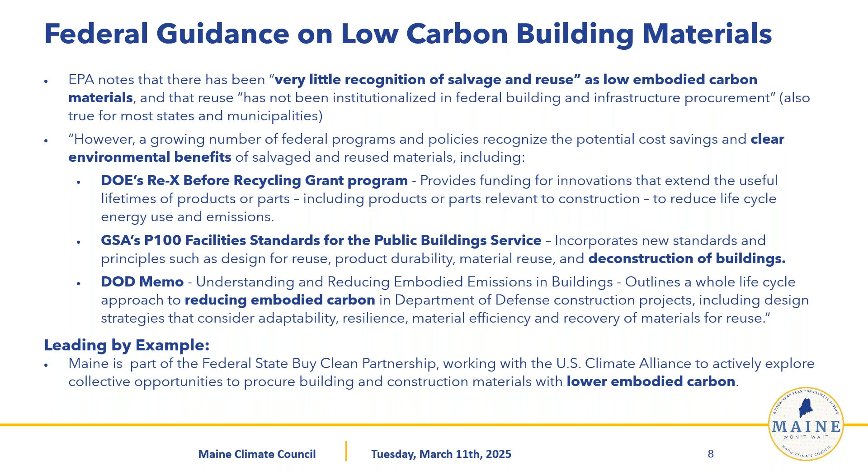Construction and demolition, if you don't already know, are a huge source of our global emissions and also a huge source of our global waste. If we were really focused on deconstruction, we also have the potential to reclaim huge amounts of lumber for building new homes, which, as anybody in the housing sector knows, we have a real shortage of housing, especially affordable housing right now. So deconstruction presents a huge economic opportunity as well as a source for materials for affordable housing.

In Maine, we have territorial emissions goals to reduce our emissions. When you look at that from the in-state perspective, waste is just a really small part of our emissions, about 2%. But if you take a step back and look at emissions from a global perspective, thinking about emissions across the supply chain of stuff, then we see that materials management — from the point of extracting resources to make products we use, to the point where we dispose of them — is a huge portion of our emissions, and buildings are a big part of that.

Resource extraction has tripled over the past 50 years, and there's scientific consensus that this has been a big contributor to climate change, biodiversity loss, and pollution. This means materials management represents a huge opportunity to reduce those impacts by using things more efficiently. Any kind of practice that preserves materials is going to reduce those consumption-based emissions.

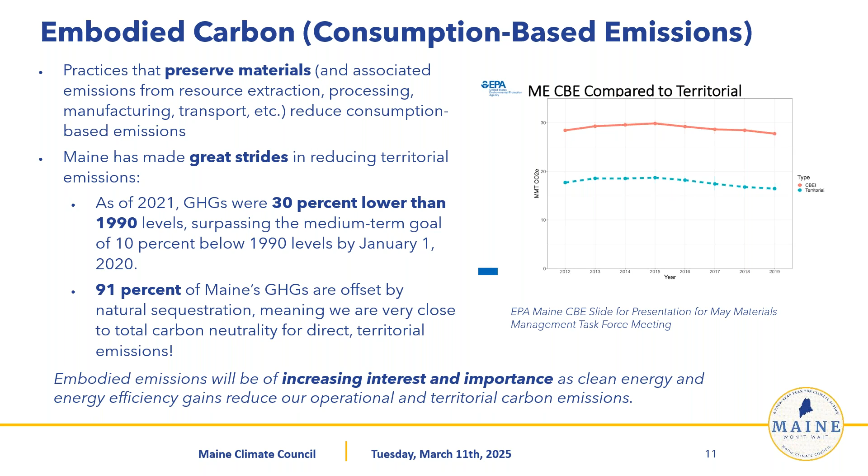So then we start thinking about our supply chain, or our scope 3 emissions. Building materials present a huge opportunity to reuse. Most of the debris that comes from construction and demolition is demolition — only about 10% comes from scrap. Even here in Maine, a small state with less than 1.5 million people, we produced over 600,000 tons of demo debris in the last year we have data for, which was 2022, and only about 2% of that made it out of a landfill.

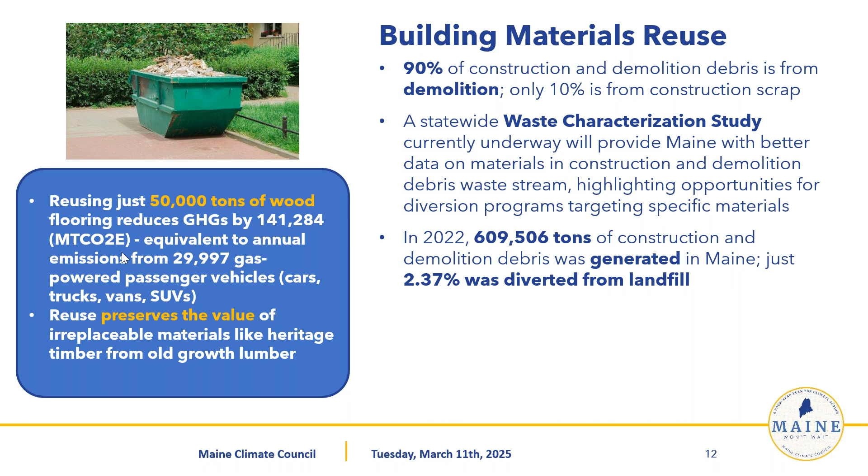Just a little snapshot here in the blue box — this is modeling done with the EPA's Waste Reduction Model. You can see that reusing just 50,000 tons of wood, a very small piece of that overall tonnage, has an emissions reduction equivalent to taking almost 30,000 gas-powered passenger vehicles off the road for an entire year. Plus, you get really quality materials when you salvage, like heritage timber from old growth lumber that you just can't find anywhere else. So there's a lot of benefits there.

Just some terms to know about deconstruction. Demolition, as you almost certainly already know, is just tearing stuff down. Deconstruction is when you carefully disassemble and try to extract maximum value from anything that can be salvaged for reuse or refurbishing. Depending on the case and the building, there's a soft strip, where you might go in and just take the really high-value stuff, or there's a whole home deconstruction.

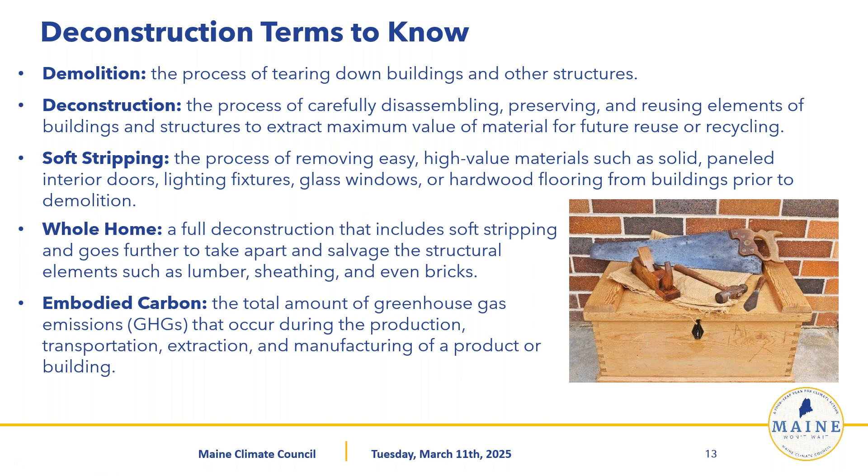And I know we're here talking about brownfields, so think whole building instead in this case where feasible, which is really when you take everything apart and you're getting down to the structural elements and trying to recover as much as possible. And then embodied carbon, I already talked about—that's the greenhouse gas emissions that occur from production, transportation, and extraction. In most cases, territories like states or local governments aren't counting those emissions because they're not part of their territorial or sector-based emissions.

There's also a huge amount of workforce development opportunity. There was a study on the circular economy just looking generally at reuse and refurbishing, and the job creation potential is massive at 300 jobs per every 10,000 tons of waste, compared to only 1 to 6 jobs for disposal pathways like landfilling and incineration. They also found that a lot of the circular jobs had better working conditions, higher pay, and there's the opportunity to bring back some historic skills, like this campaign for historic trades, linking deconstruction and some of those traditional skill-building trades along with construction, learning how to reuse and refurbish and build things from scratch. So when you pair construction with deconstruction skills, you really get a workforce that's capable of a lot more, and it opens up new economic pathways for different jobs.

There's also community resilience here. Communities where they have refurbishing warehouses kind of give a sense of place, and you can bring people in from the community to learn skills. That would be obviously different from a business environment, but in some cases there's entities like the Finger Lakes Reuse Warehouse, which is more of a community organization, but they're still teaching skills and turning out workers who have grown as a result of being involved.

There's also been some examples of public-private partnerships. In Phoenix, they started a reuse hub, and it resulted in 19 companies that were launched, 14 patents, and 15 products over the course of 6 years.

And then just a little bit more on that particular study, just to get the high-level idea of what's in there, noting that in many cases, whether or not deconstruction is going to be applied at a site is a ranking criterion. So if you're applying for a grant, for example, it would make you more competitive to work in aspects of deconstruction or material reuse. They're going to want to see that in the grant application. It saves money, resources, job training, and it also has the potential to earn LEED credits for a site. Not to mention, as they say, it's just also the right thing to do. And there's also guidance in that guide on dealing with things like lead paint, asbestos, and other contaminants that we find in a lot of these older buildings, particularly brownfield sites.

So just again, the triple bottom line of deconstruction—there's social benefits.

In many cases, where some of these brownfields are being demolished, there are communities that are impacted. The demolition tends to take place in lower income communities, and communities of color have been disproportionately impacted. Contaminants from site demolition can end up contaminating the air and the water. So again, another reason why deconstruction is really a safer way to go.

A huge amount of economic benefit. A study out of New York found that shifting to building deconstruction from demolition would really reshape an entire sector of their economy in a positive way.

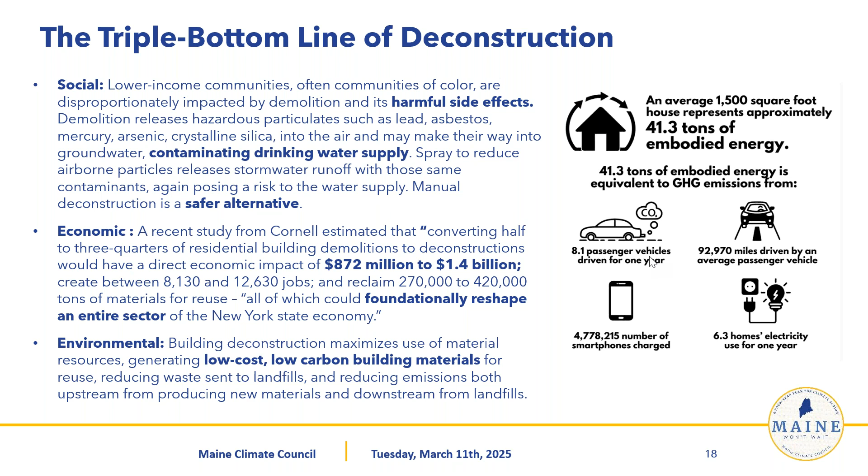And then obviously we talked about the lower embodied carbon for these materials, which really is a huge benefit. Even just a regular little single family house has about 40 tons of embodied carbon, so something to think about. Just on any level, a bigger building obviously has even more of that.

Thinking about municipal procurement for salvage materials, or partnering with organizations like those involved with historic preservation, are typically good partners. And it's also really important to have marketplace development for the reused materials, to ensure you've got an end market for the materials once they're salvaged.

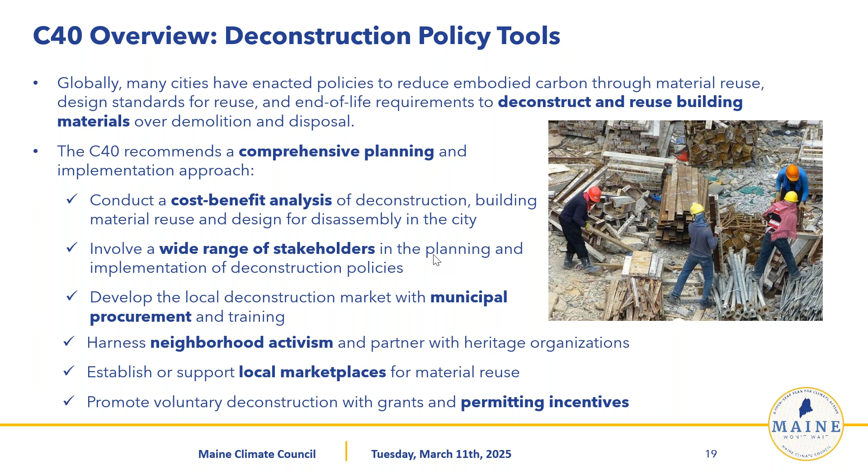So just a snapshot, deconstruction is in our climate plan in Maine now, and there are a lot of other, mostly municipalities, but there is one other state that has a climate plan, and you're seeing a lot more awareness of deconstruction potential in municipalities that have passed deconstruction ordinances. And these aren't all mandates. Some of them look different, some might be tax credits, so every one is unique to the community where they're passed.

And then the biggest barrier, of course, is just low cost disposal. But with deconstruction, there are other costs that are not factored in. When you're looking at demolition, it's just one lump cost, but with deconstruction, there's also economic benefit from the materials that are salvaged. So it's important to think about it in that long-term perspective over the course of a job, rather than just the upfront fee.

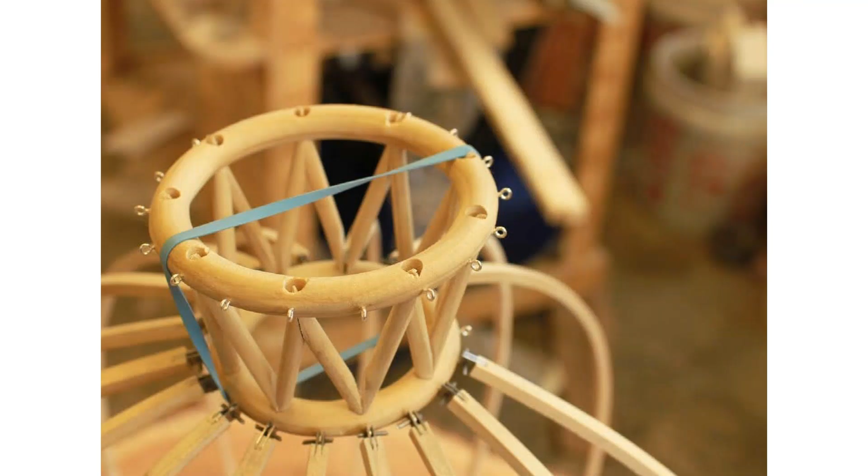What I experienced was, in shifting all of the studios out of that former space into the new studio, it allowed the shop to expand considerably in that old building, and that had a much more transformational impact on the architecture program, art program, and planning program which the shop served. There was enormous opportunity for students to learn more about hands-on building processes, which I think is really important for architects to learn.

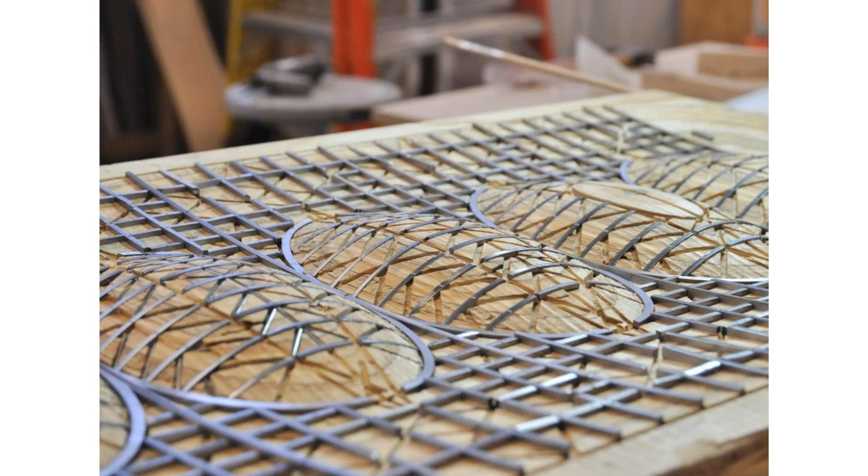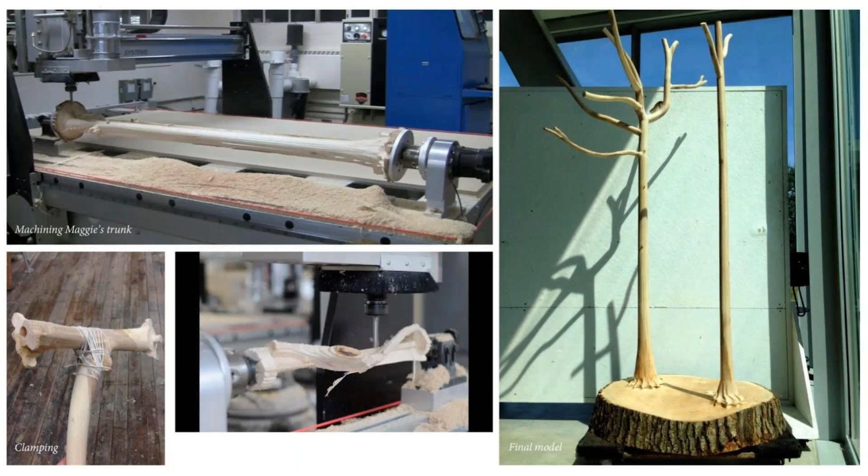So I helped students, assisted them with all these different complex projects, building models and things like this. We built practical things as well, canoe paddles and other models.

One of my takeaways from that job - I worked there for 5 years - was that we had a dumpster outside, and right after the projects were over, students would often be throwing out their models that they spent hours slaving away on, all-nighters and all of that. I just thought, couldn't there be a better way? Could we be thinking proactively about what these things could become afterwards?

So again, there was this revival of hands-on practices with the shop, but there was not as much thoughtfulness about where materials would go. So in my last year working at Cornell, I helped co-found a student organization called Building Community, where students from any department could join and work on community-based design build projects.

We started to partner with some of the local reuse facilities. There were 2 significant elements at Ithaca Reuse. We worked with a 4-H program here, building benches and teaching them how to use basic hand tools. We also worked with Hammerstone Builders - this was a women-led building project.

Reviving old sort of shops like typography, putting together dinners and supper clubs, and we built all of the tables for those and got people involved.

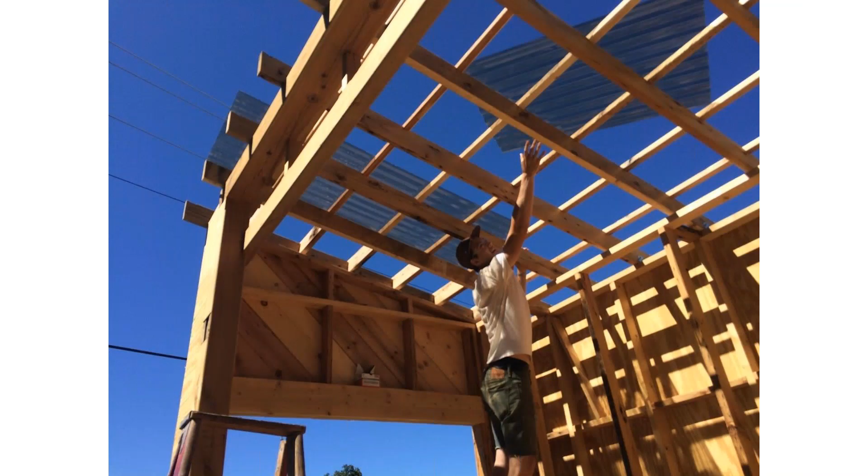The biggest project we did there was building what we call the traveling tool library, to make tools available to the public. For this project we used entirely salvaged materials from some of those stores I mentioned before, as a way to learn how to work with older lumber that might have defects but is certainly workable back into newer projects. This project was not only a tool library, but it also became a stage set for performances, and it's still out in Ithaca being used for a variety of things.

My first intersection with deconstruction and a reuse business was in Buffalo, New York. I started working with a fellow out there and his business Reuse Action - this fellow here, Michael Gainer. He landed in Buffalo, having used to live in the Boston area.

He was there when the mayor instituted a fast track demolition program, which a lot of mayors in Rust Belt cities did around that time, in the early 2000s. He was calculating in his head how much taxpayer money essentially was being used to clear away what were deemed abandoned buildings and hazards to the city, when people across the street needed to repair their own buildings and homes, couldn't afford materials from stores, and were also looking for employment. He connected the dots and realized there's something here we can do better.

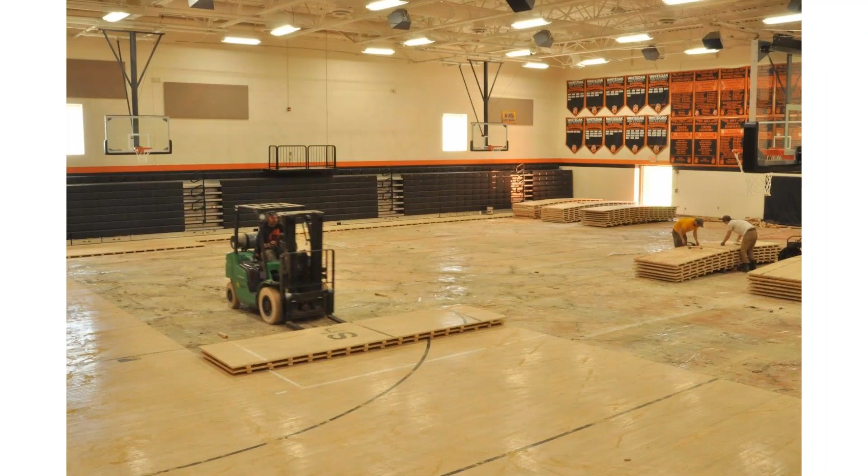So he founded Reuse Action. I did a little bit of work with him. He started with trying to intercept a lot of these homes slated for demolition by the mayor, but I also worked with him on this example here - saving an entire gym floor.

We actually did 6 of these at different public schools. One thing I think people don't really think about in terms of deconstruction is that demolition is fairly straightforward - it's just how quickly can you get this material, crush it, and get it in a dumpster and remove it. Deconstruction has a lot more innovative potential.

The way a gym floor would normally be demolished is you'd go in there with maybe a crew of 4 or 5 people, cut sections of the floor as small or as big as you can where you could still pick it up, then walk it out to a dumpster and throw it in. I actually witnessed this when I was working at Camden Hills Regional High School here in Maine - later on we had to have our gym floor replaced because of water damage, and it took about a crew of 4 or 5 people over a week to do that.

Whereas Michael, myself, and one other person shown here in the image were able to save this entire floor in just a day and a half. With a forklift, we just snapped lines, cut the pieces into sections, 4 by 16 foot, palletized it, and then the trickiest part was just kind of getting it out the door.

But this shows that deconstruction can actually, in certain cases, even be more efficient because you're really thinking thoughtfully about what you have to do and how you can make all of this stuff sort of available to the marketplace again.

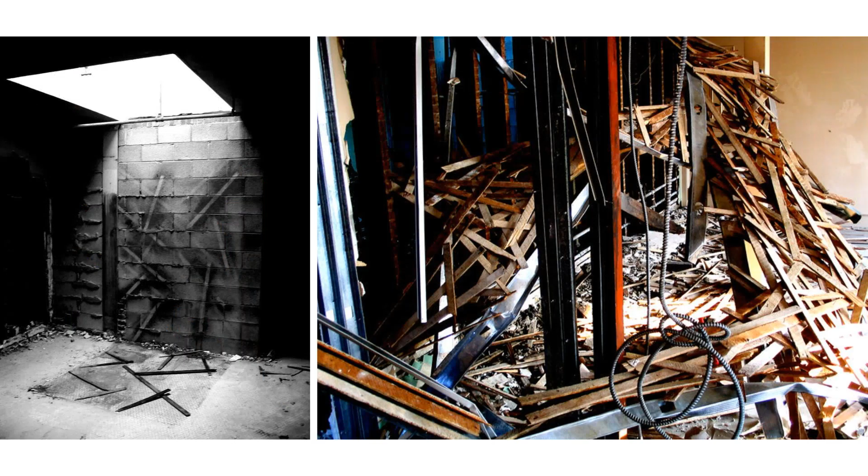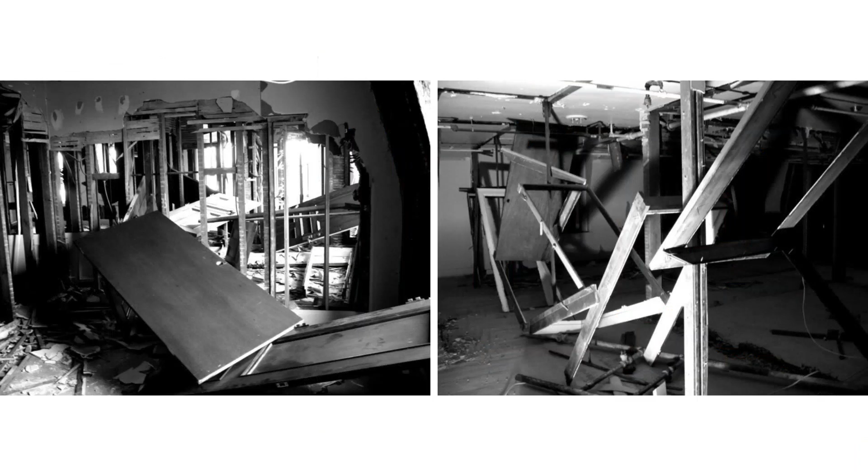His work actually started with when he moved to Buffalo. He was doing demolition at night, and teaching at the school during the days. One of the things he started to do was make art installations in some of these demo projects, kind of moving materials around, making these installations, photographing them, and then putting everything back before the rest of the crew arrived in the morning.

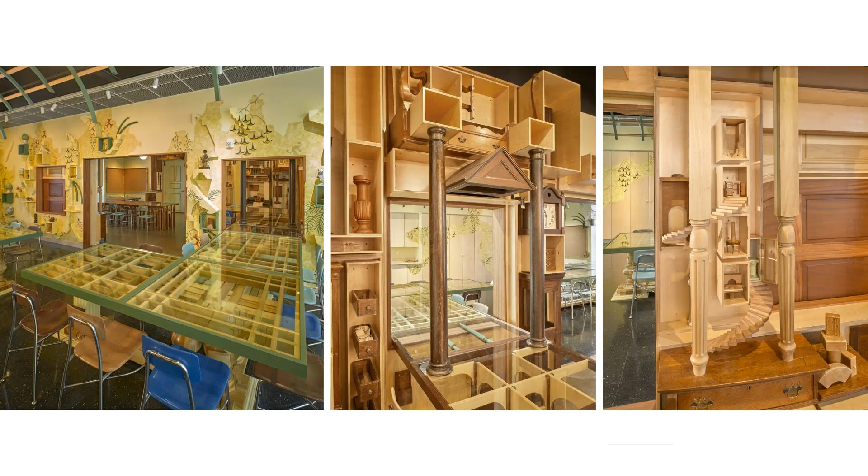This sort of obsession with material waste kind of led to his art practice. So he does everything from large scale sculptures to wall pieces like you see here. Today he's now doing all kinds of architectural interiors and things that, again, are just using things from the waste stream in Buffalo. He loves to go to estate sales religiously and pick away things that people see very little value in and make them come alive again.

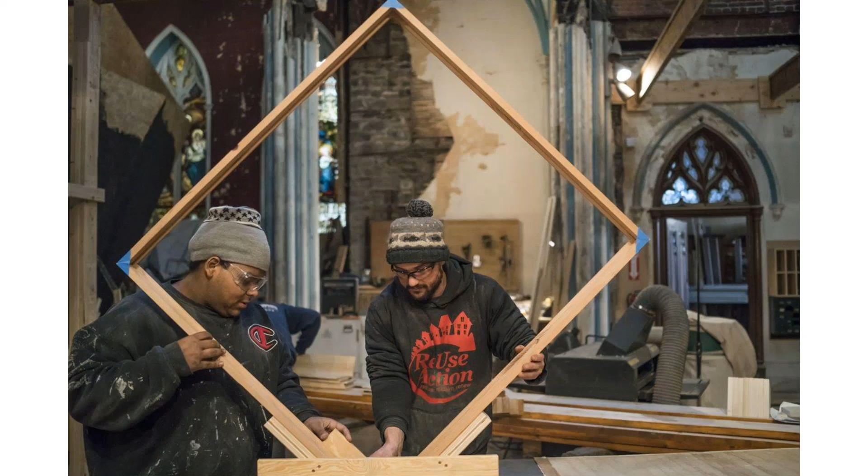So we turned a lot of the materials that we found in this church, like the pews, into work benches and work tables and sawhorses, and cleaned up the sanctuary into the wood shop, bringing in all sorts of experts in furniture making. There's me working with one of my students on a huge frame that he wanted to make. This program is still running, and it's developed a lot since then, but it's just another example of how deconstruction can go so much further past just waste diversion - it's also an amazing opportunity for education and workforce development.

I then moved to Chicago, where I worked for a bit at a nonprofit called Sweetwater Foundation. Sweetwater is located on the south side of Chicago in a neighborhood that's been also the target of fast-track demolition under Mayor Emanuel, Rahm Emanuel. Emmanuel Pratt, shown here with me, is the executive director, a really brilliant human being, super creative, with a background in architecture and urban design and urban planning.

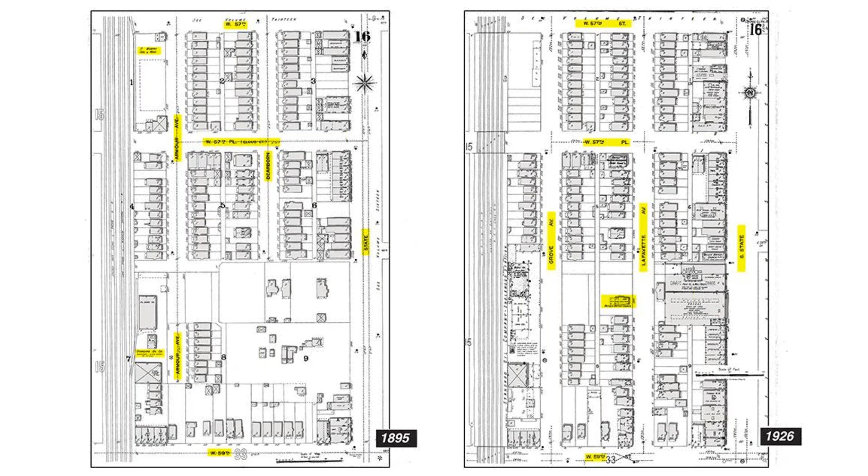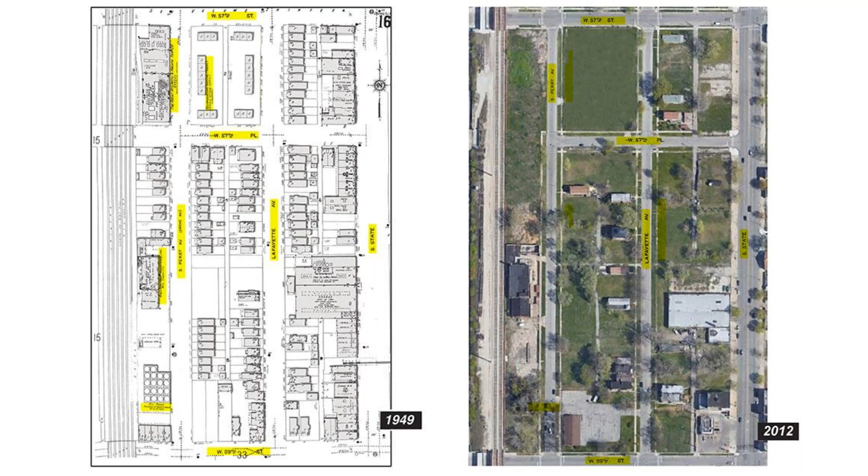Here's some Sanborn maps that just kind of show you the area, which used to be highly populated, but as you can see, in 2012, when Sweetwater was started, so many of those buildings, those homes that you see in the image on the left, had been demolished as part of this fast track demolition initiative instituted by the mayor. So what do you do with all of this vacancy?

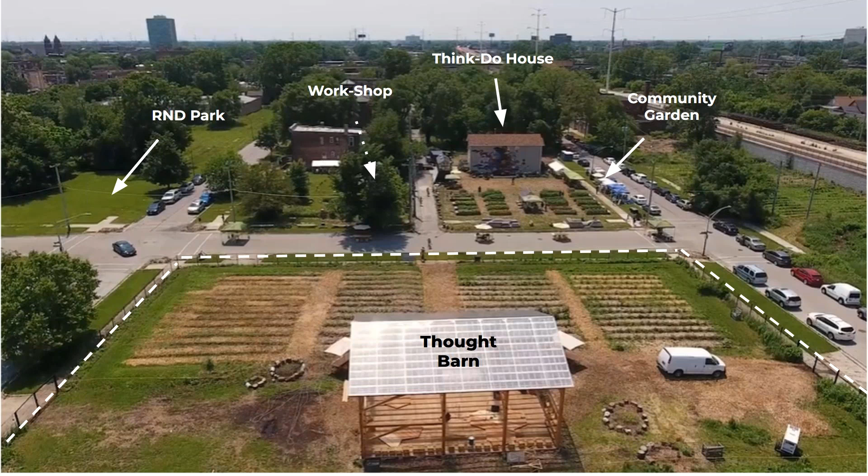So Sweetwater has started to rebuild the neighborhood with folks who have stuck it out and who still live there, and also bringing in folks like myself from outside to help be part of that network. They did the first - you can see on the bottom there, the Thought Barn is in the middle of an entire city block. It's the first timber frame barn structure raised in the city of Chicago since the Great Fire. This is a community space, and surrounding it is a community farm, because this area is technically also a food desert. So growing food is a huge part of what Sweetwater does.

And a central principle at Sweetwater Foundation is transforming waste to resources. So all of the building projects that we did, we almost exclusively sourced materials from the region's waste stream, often higher grade pallets that we're shipping, say like large expensive glass to do new construction downtown.

We would intercept those pallets, take them apart, and turn them into, say, raised beds. This is the community garden, open to the public at all times.

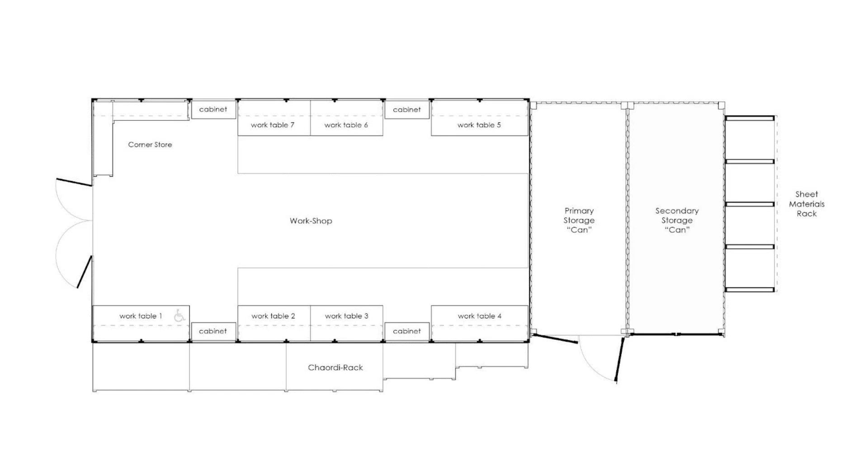Also on the farm, intersecting with a lot of local schools, public schools, so they can do outdoor education. And then there was also, something I sort of specialized in, a carpentry apprenticeship program for youth, which we built out of a greenhouse space so we could keep it heated, just using sunlight even during the winter.

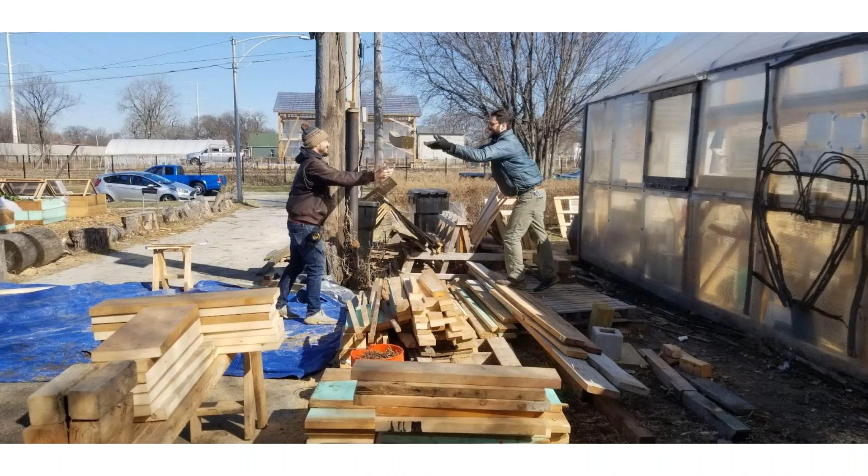Just using what we had, being really resourceful, cleaning up, and turning it into a curriculum - how to take old 2x4s and turn them into all sorts of furniture projects and other things. These are called fractals, and we would sell these too, and a lot of people in the area liked to buy them and support what we did.

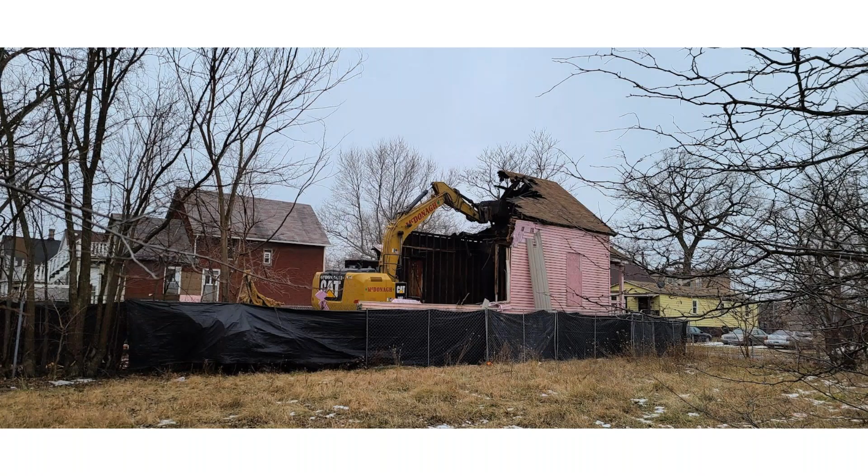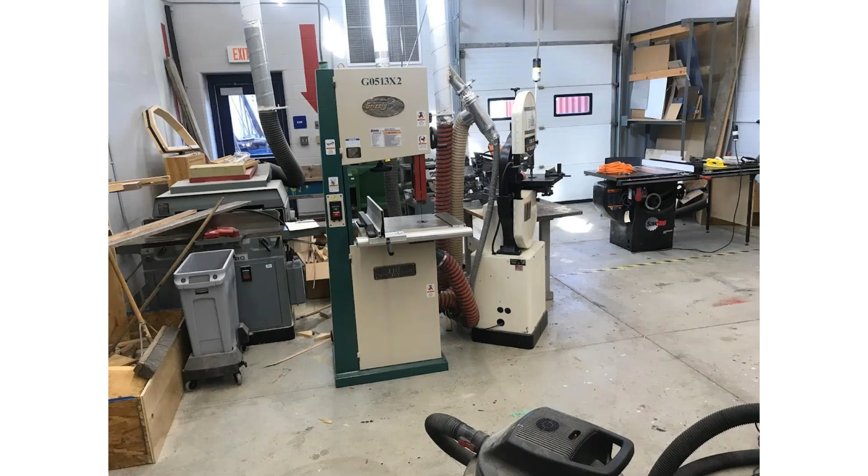There was materials everywhere outside, and the tools were all kind of all over the place. But having just come from Sweetwater and seeing what transforming waste to resources looks like, I saw the amazing potential in all of this. There were a bunch of pallets, so I thought we would start with that. And I rebranded Sweetwater's tagline, Transforming Waste to Resources, into Radical Reuse.

So for this program, I instituted this principle - the idea that we would only source materials from our region's waste stream, to do educational projects with students that had some sort of community benefit. So we collected a bunch of pallets from local hardware stores and other pallets that were around the school. This program started when COVID was still something we had to be sensitive about.

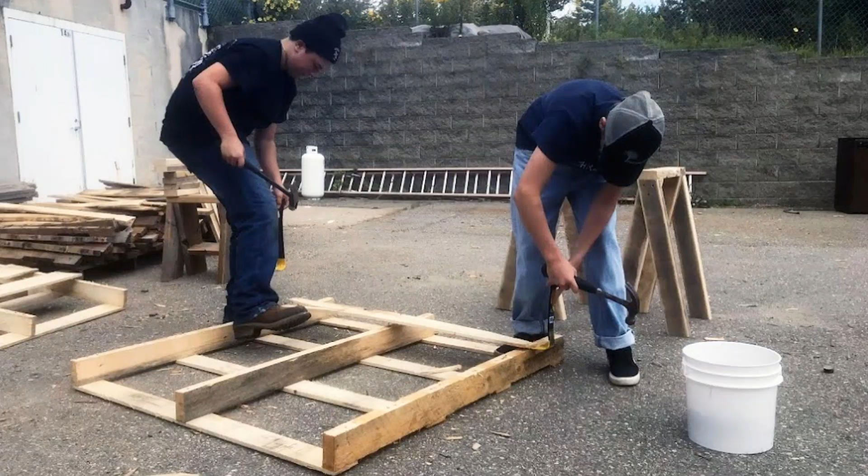There was a mask mandate when we were indoors, but students could take their masks off outside. So I hosted outside what we called Pallet Palooza, which was like a pallet deconstructing party, just to introduce myself and the students to the idea of salvaging materials.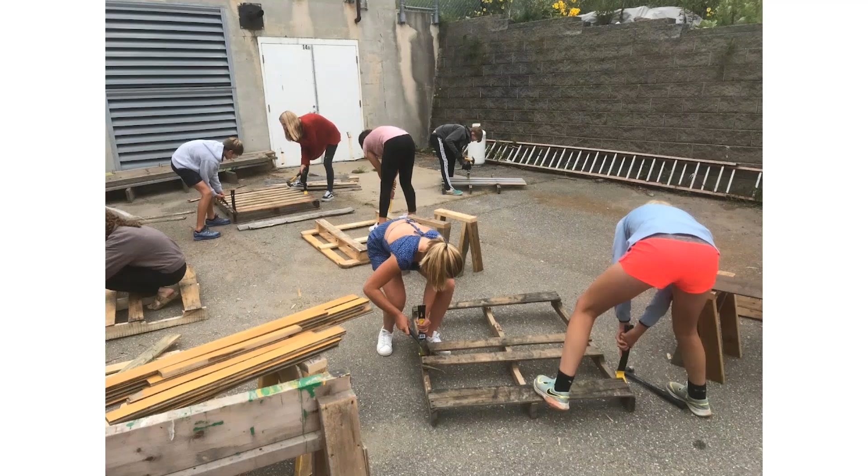I didn't know how this would go, but students were really into it. There's actually a lot of technique involved in taking pallets apart successfully without breaking the wood. So they got to learn how to swing a hammer and use a pry bar properly.

Skipping ahead to three years later, once the program had done all these projects in the community, it had gained a reputation for this idea of radical reuse. There were folks asking, could you deconstruct this house or this building in town? And so I thought this house we're seeing here was a good opportunity to try that.

So we did this last winter. This was a house right in Camden, built in 1890. And it was a good candidate for deconstruction because it had been vacant for 40 years, and there was no insulation in the walls, surprisingly.

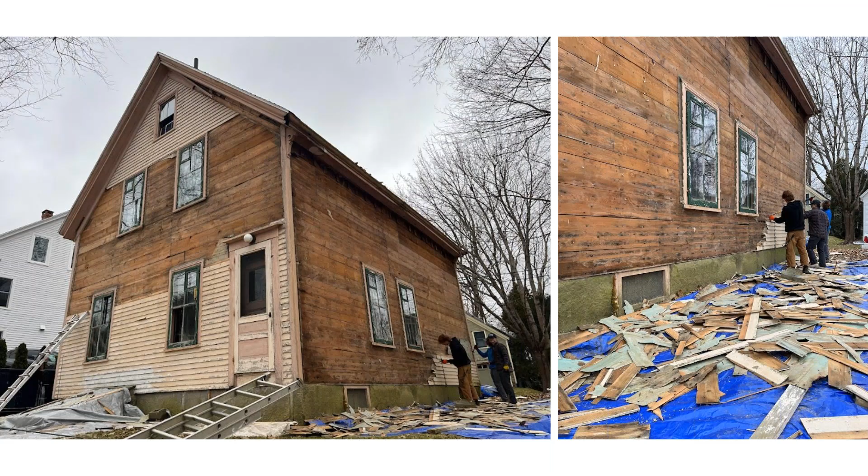There was no asbestos present, so a lot of the hazards that normally come up for projects like this, we didn't have to deal with. There was lead paint, so when we started with the siding, we just tried to contain the lead paint as much as possible - no cutting, just prying it off. In places where deconstruction is a bit more advanced, like in Portland, Oregon, for example, which Megan mentioned, even these materials often get saved and repurposed.

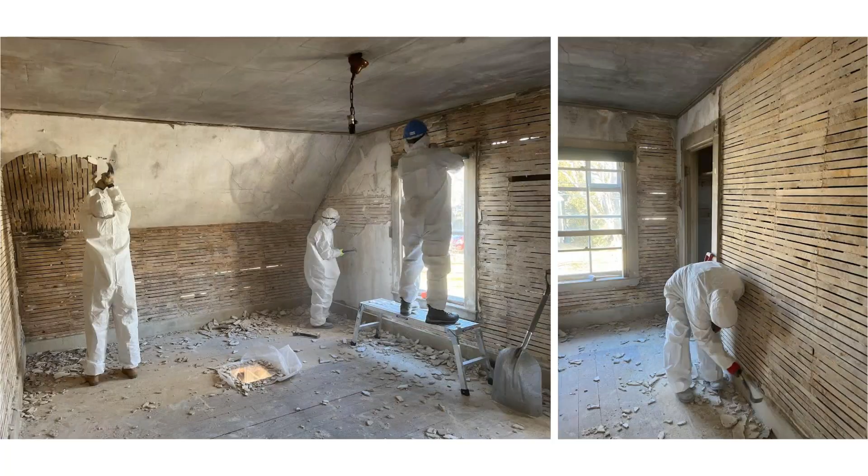But just to minimize hazards, this was one thing that we decided to just remove and dumpster. We took the plaster down next. A bunch of students and some of my friends were involved in that.

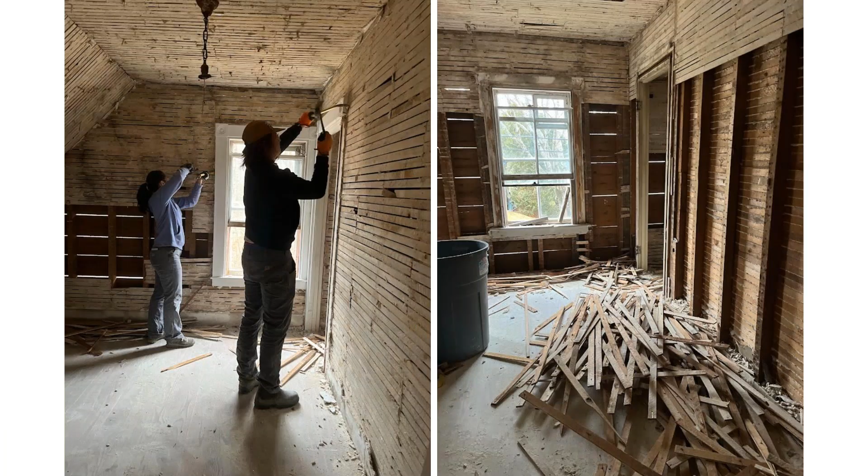Again, there's innovative ways of doing this sort of quickly and smartly. Plaster is incredibly heavy and messy, but rather than bag all of that ourselves and carry it out the door, there was a site worker who was going to come in and redo the foundation. There was a new structure going up there. So we communicated with him that we would put these bulk bags in the basement and sweep everything into those, which made it much easier to deal with. Then he could pick those up and deal with them when he had a machine present.

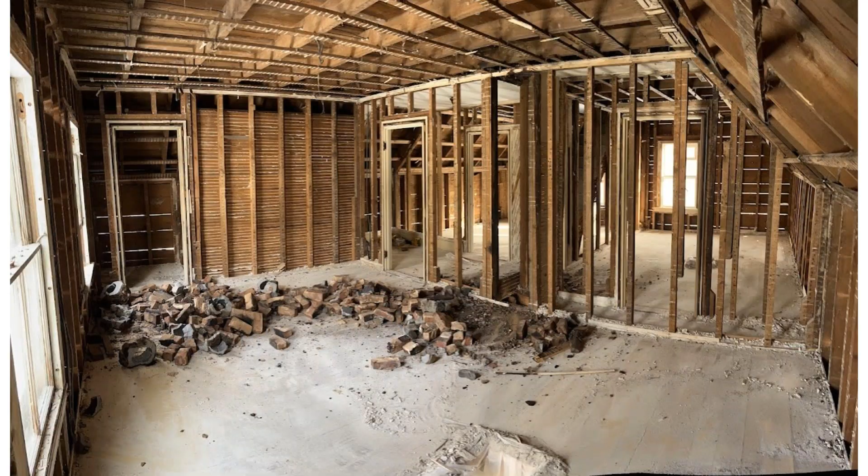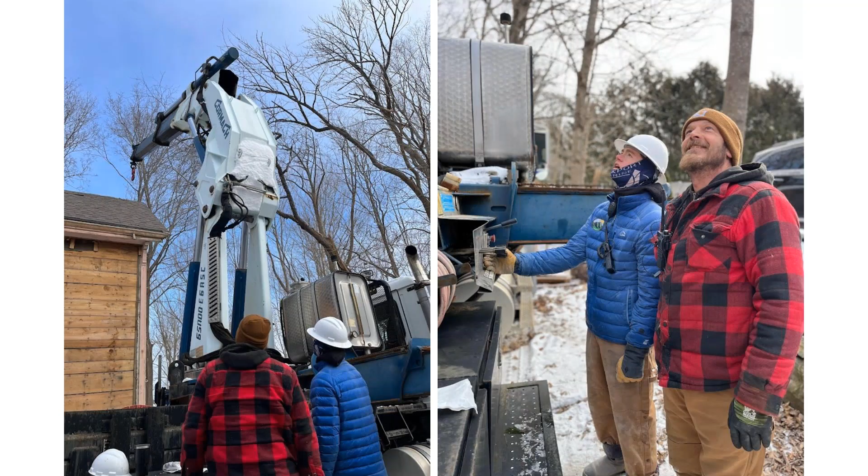We saved a lot of the lath too, which I'll show you later what that can turn into. And then using techniques that I learned from my friend Michael in Buffalo to get off the site quickly and not hold up the contractors, we cut the house into sections and used the boom lift to bring everything to the ground so we could deconstruct it off-site at a later date and not have to slow anything down.

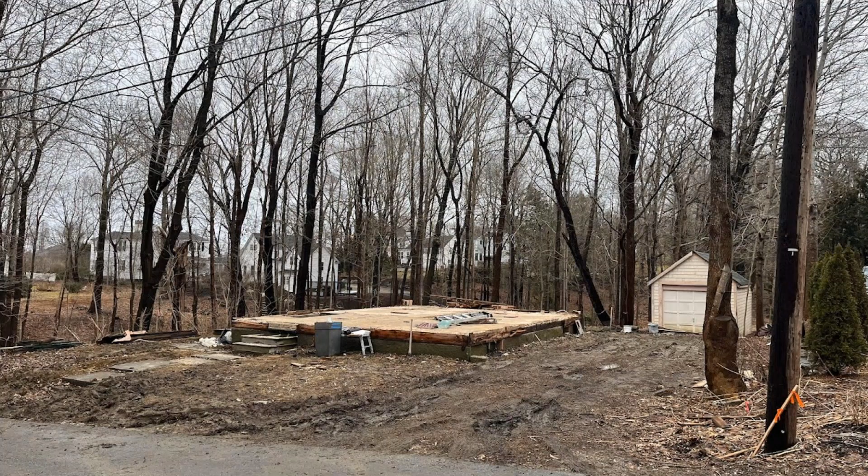That was the house. Just got a couple more minutes. So just, okay, yeah, yep, one or two minutes. Almost there. Okay, thank you.

Everything that I couldn't personally use, or the students couldn't use, like the windows and doors, got donated to Habitat Restore. So there's opportunities to create partnerships with folks who are already doing this work.

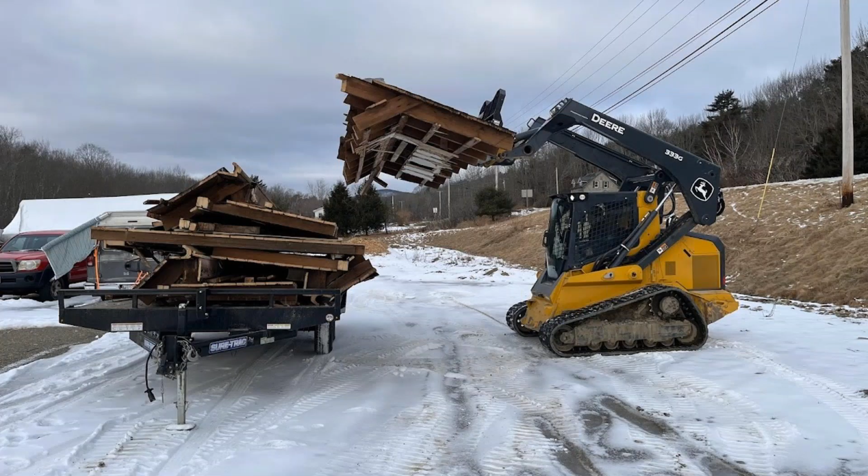And slowly over time, as we needed materials, we would bring these sections over to the school, denail them, and we had a whole stockpile of materials to do all sorts of different projects.

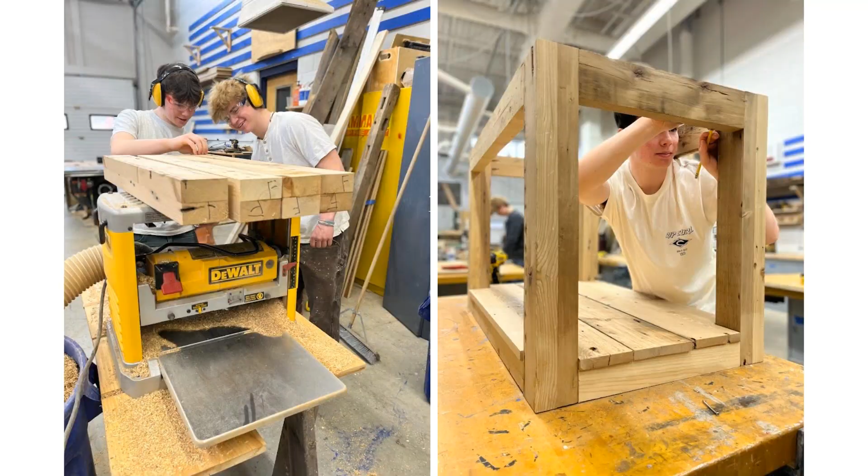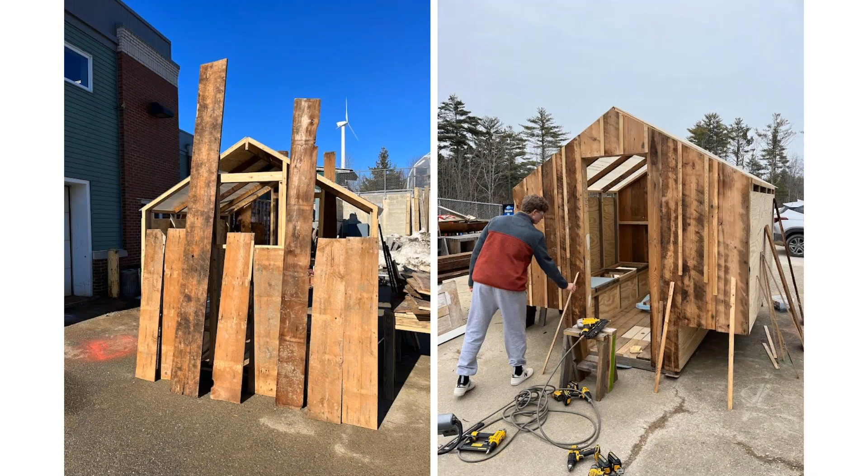I worked with a lot of hockey students and they needed a stick rack for their locker rooms, so this is the stick rack using lath and some of those sheathing boards from the house. This is for the ceramics class, a table that helps recycle used clay with a plaster slab to extract moisture from the clay. Ice fishing shack, tables, guitars, all sorts of things.

Even working with the middle school and doing some projects, some benches outdoors. And a bunch of musical instruments as well, and even some performances.

Another benefit of doing deconstruction is we lose a lot of our history when we take older homes down. And Knox County, I think, has some of the oldest housing stock of any county in Maine. So as we were taking the house down, on the back of the siding, we saw all these old companies that used to exist.

And even in the walls, I found some film and got it digitally scanned, and it was all these images from, I believe, the Korean War. I'm still sort of unpacking the history of this house, but all this stuff would have been lost had we not deconstructed it.

So yeah, again today I've started a business, bringing this whole idea of radical reuse forward to the next level. I started a company called Second Story Builders.

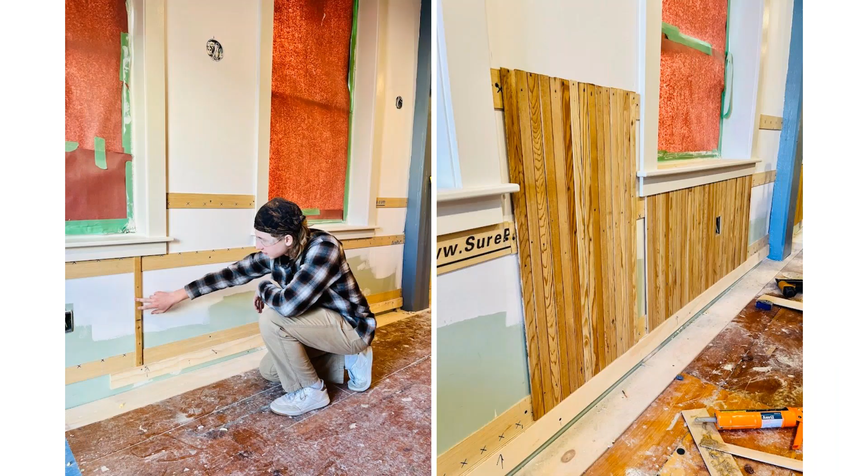I've been continuing to work with students and youth on a project right here in Camden. There's a cafe that's going to be open in April, and we're using a lot of the materials from this house. Here's some of the lath to do some of the work on the interior. This is just one example of what you can do with lath - clean it up, skim plane it, and we're using it to make wainscoting in the new cafe.

And I have a few deconstruction projects lined up for the next few months. So anyway, if you're interested in learning more, please feel free to reach out, or if you have deconstruction work, I'd love to help give you some advice on that. So I'll end it there.

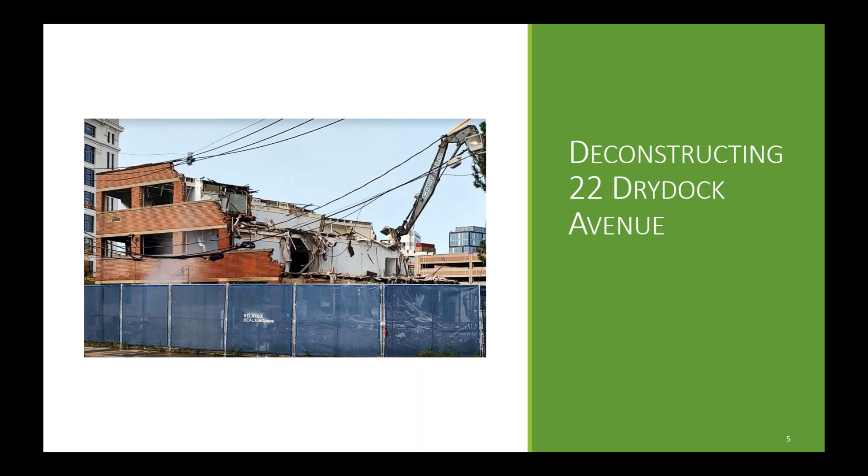So Jennifer, the first project we'll look at is an area of Boston, the Seaport, where we were engaged to take down two buildings, 22 and 24 Dry Dock Ave, for a local developer. And we set about this very intentionally from the beginning. Jennifer, if you could flip forward.

We evaluate every building and every work site, always looking for salvage, recycling, and reuse opportunities, certainly in the construction of the buildings we deal with that are most important, and the recoverability and recyclability of those integral building materials. We rely heavily on source separation of materials so we can streamline the end disposal or processing facilities, rather than rely on bulk commingling of material.

In order to do that, you need a great plan. You need sufficient space to do it. We need the cooperation in every case of the owners or contractors we're working for, because these projects are usually tied to new construction work on very tight timeframes. So we need to satisfy the customer's timeframe and work within the space requirements to source, separate, recycle, and recover material.

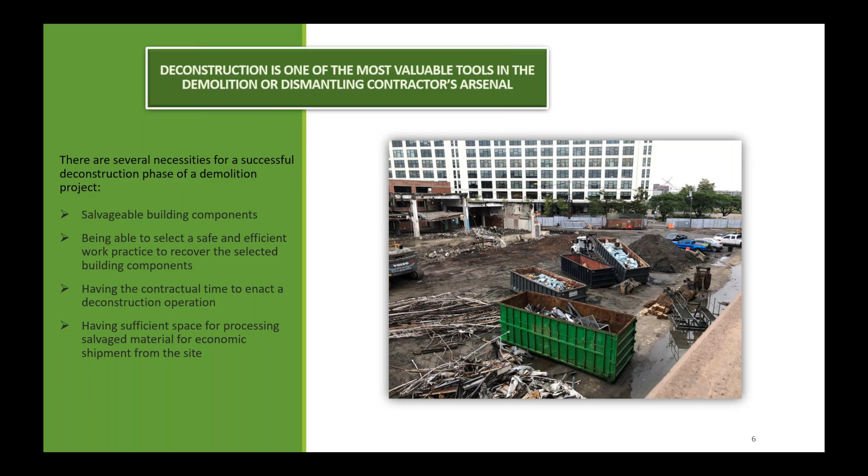This particular building was quite interesting. It was part of a LEED Platinum project for the build-out of a new bioscience lab in the Seaport. This building was a Navy building dating back to the Boston Navy Yard, built in 1922. Part of the LEED Platinum project was the salvage and recovery of architectural artifacts.

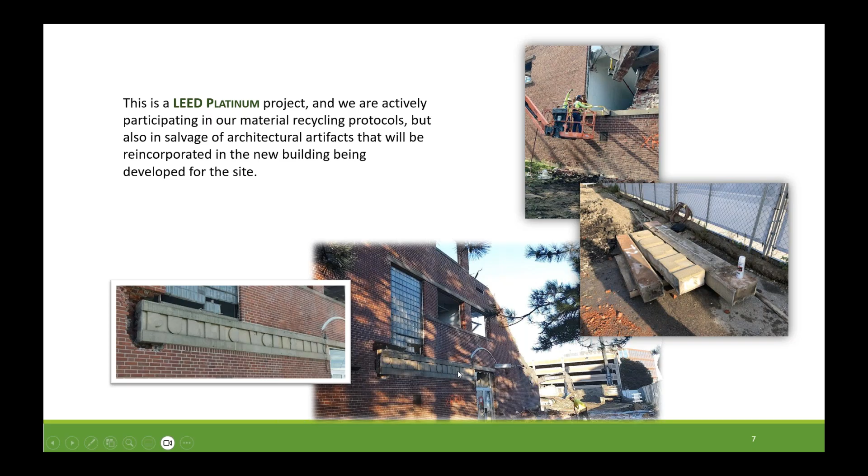So we took out a very nice Art Deco carved sign that announced the Public Works Department of the Navy Yard in Boston. That granite edifice, if you will, was going to be implanted in the brand new LEED Platinum building. Just an interesting recovery.

The building itself we recognized immediately as having great potential for salvage and recovery of, in this case, heavy timber framing. We've developed over the years a fleet of equipment with specialized attachments — in this case, one of our high-reach excavators with a 360-degree rotating grapple that allows us to very precisely grab hold of and dismantle structures like these timbers from a building without damage, allowing careful deconstruction of the building.

Relating back to our general strategy, we have this fleet of equipment that's very versatile and multi-purposed, and can be used on a number of types of projects. Okay, Jennifer.

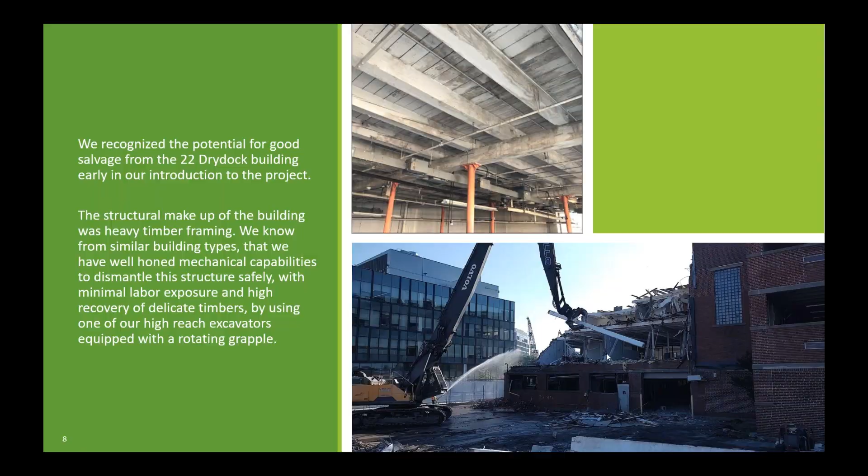The planning for this, as we saw in all the other presentations ahead of us — Danny, in your work, and Megan, in yours — you need a plan, and you need to have space and the ability to handle materials so that it can be salvaged and reused.

In this case, the building in the lower right, where Jennifer has the cursor, was the adjacent building to the one with the timbers. It was all made of concrete and brick. So after asbestos abatement and hazmat recovery in that building, we designated that as the workspace, the storage area for the material to come out of 22 Drydock, which is the building on the left that had the substantial recovery.

So we utilized our time and space and created a great staging area for the material coming out of our building.

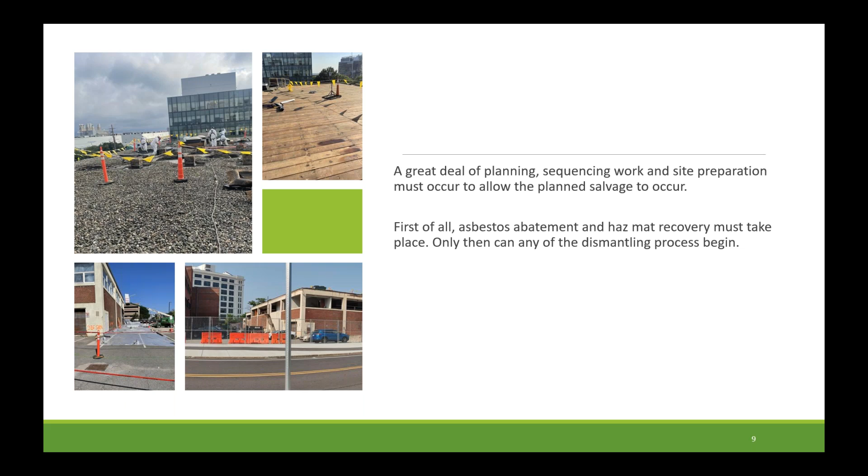We feel, in our work and our safety experience, that we don't want to put people in the potential danger of dismantling or disassembling these large timbers, portions of the structure, by hand or in close contact. So we do that mechanically, and we have very few laborers on a job site.

Most of it we use large machines and small skid steers to move material around, and we're able to have very substantial recovery because of our techniques and the material we're trying to salvage. If it becomes much smaller than that, it becomes very difficult for us to handle, and frankly we don't have the outlets for the end product.

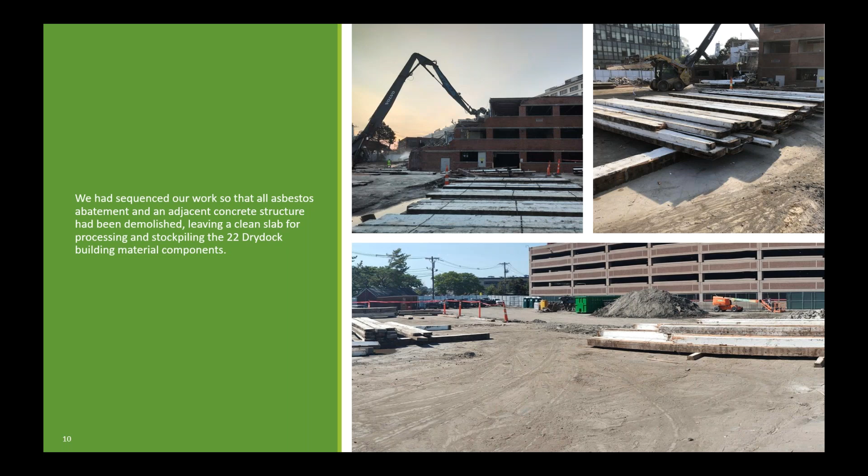Again, we're looking to source-separate material. We're continually separating material and shipping it off-site by waste designation — where it goes, where it can be recycled, or where we have to go for disposal or processing. In this case, we have six-plus grades of material that would derive from this one project and this one building, all going to different disposal or processing facilities.

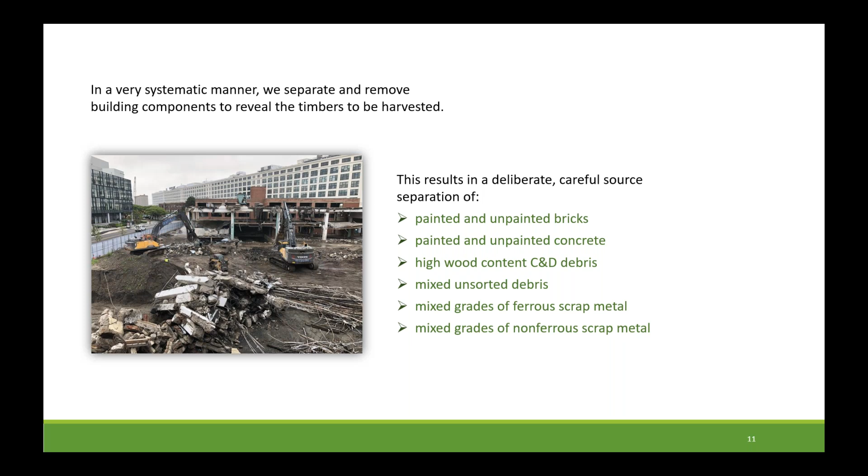So we sort material like that because it makes the site organized and safe to walk around, but also we have lower disposal costs by being more particular about the materials and bringing them to facilities that specialize in reuse of that material. Okay, Jennifer.

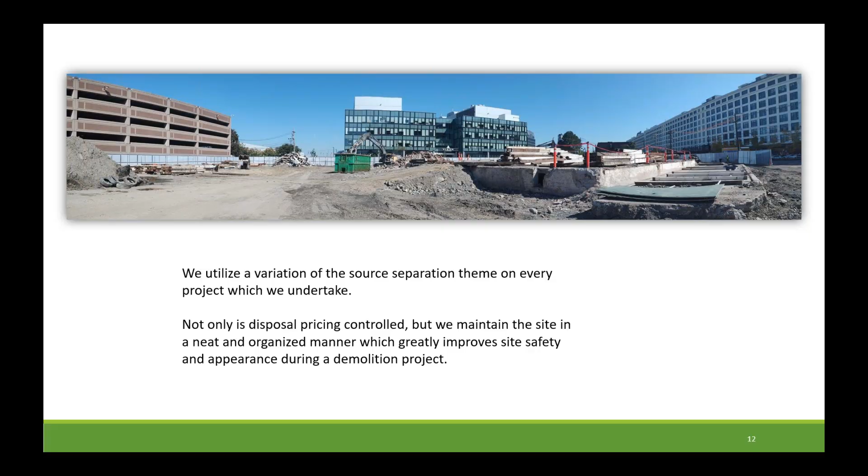Here we are with some of the timbers that were recovered from this building. We knew that it was built in the early 1920s.

It was a government building, and we could tell by looking at the wood that it wasn't southern yellow pine. That's the ultimate goal when looking for heavy salvage timbers, but this was Douglas fir. We knew going in it probably was, because of the time frame of the building in the early 20s, at which point yellow pine would have been used up. On a government building, they would source material from, particularly at that time, the Pacific Northwest, where the Doug fir would come from.

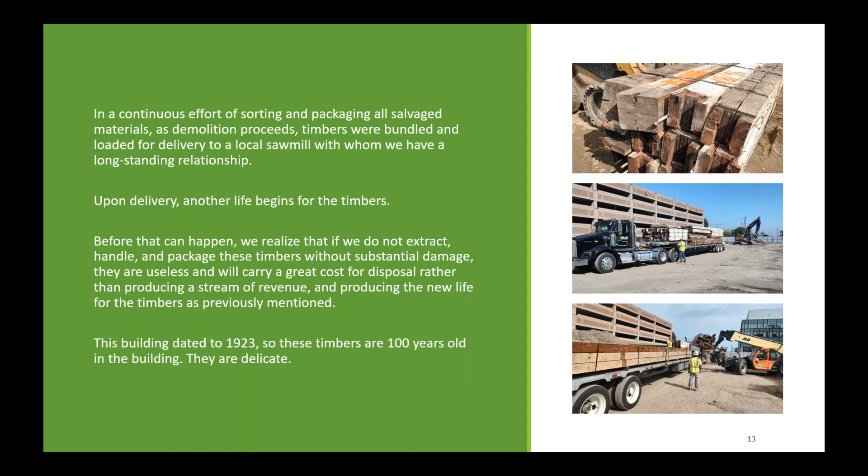So we had 100-year-old timbers that, given their size, are still quite fragile and delicate. We handled them gingerly on the job site, bundled and strapped them for transport, loaded them in economic loads weight-wise to fit on a trailer, and shipped them off to a local sawmill.

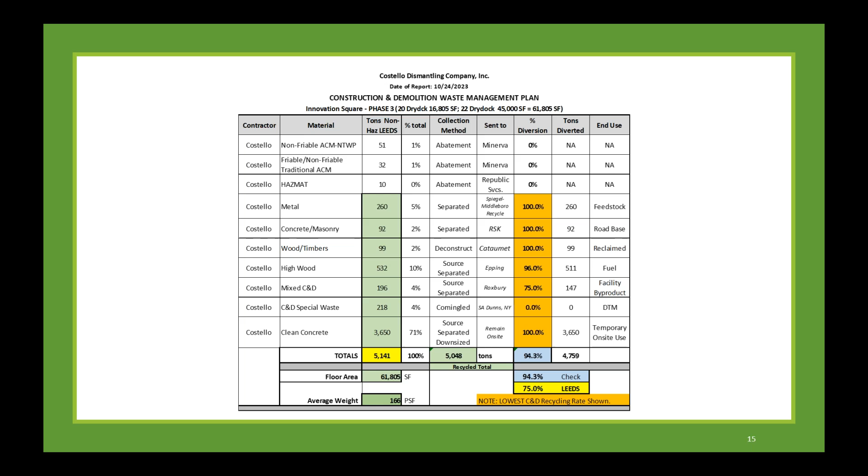So we took a lot of attention in each of those different end markets, if you will, for all the material, and came up with a very high recycling rate. That's one project, and it highlighted a lot of good salvage and recycling, because that was the bones of the building that we had to take down.

We'll go into another project, a Brownfields project, that on the outside you'd say looks similar - similar vintage, similar brick exterior - but a building that had very serious contamination issues. This was the Armory in the city of St. Johnsbury, Vermont, that we were engaged to demolish.

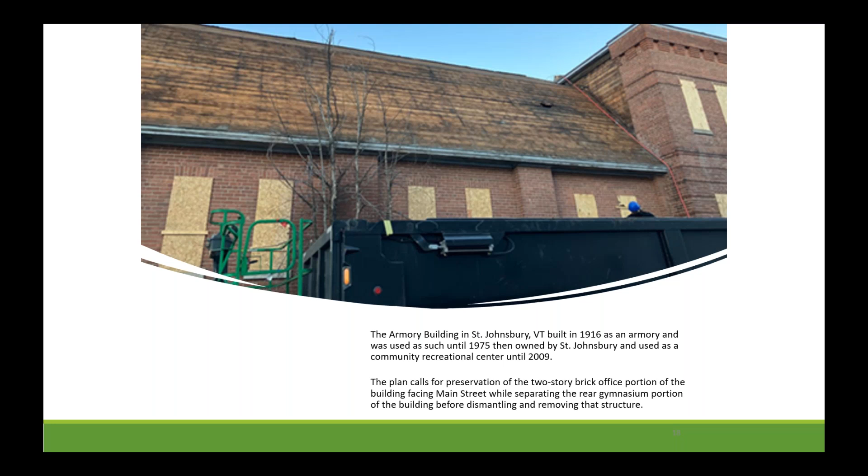We knew early on that part of this was the salvage of this existing historic facade, and the rear portion of the building. We had to make a physical separation between the two structures, with the first building obviously staying in place, and the gymnasium structure coming down to make way for a new building that's going to be used by the St. Johnsbury community - I think for public service, fire, police department, and 911 housing for the space, the footprint that's going to be exposed.

We had a very, very good and extensive hazardous material survey for this building prior to the start of work. The city of St. Johnsbury had received very substantial EPA and state brownfields funding for this project, and over many years of development they used those funds to carefully identify hazardous materials within the building. As we'll see, we had asbestos, hazardous materials, and PCBs everywhere.

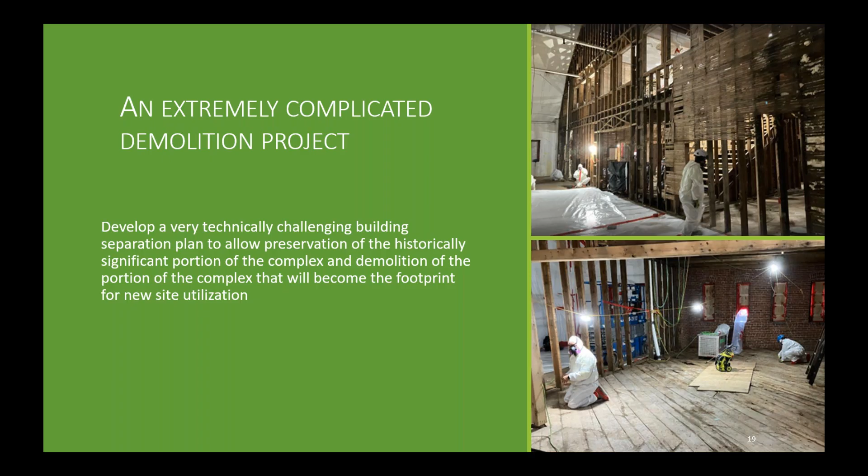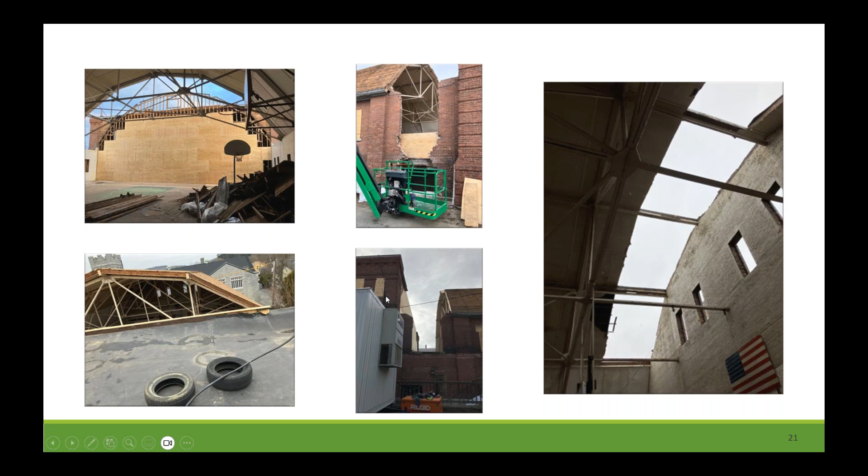This typifies the separation we had to make between the buildings - in the center picture, the building on the left of the separation is going to stay, and on the right of the separation would be taken down. But everything was PCB contaminated, either with paint, with caulking, or with spill material in some cases. We found, and it was established, there were 10 identified waste streams.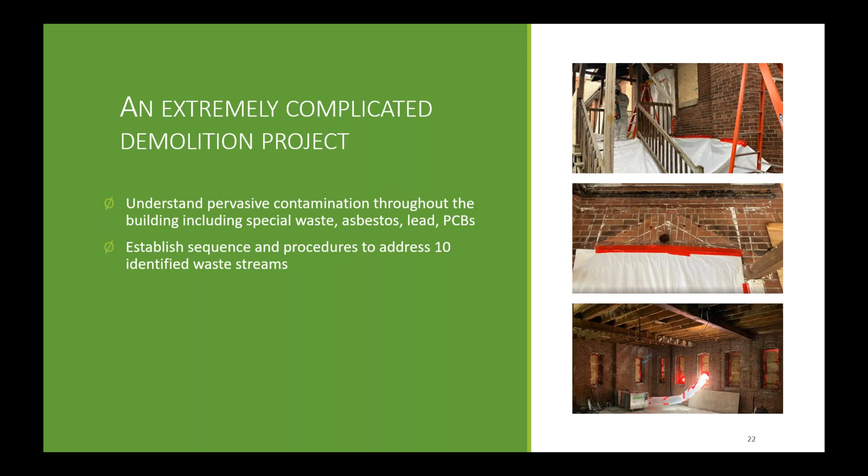Our task became to very carefully identify and, to use the analogy, source segregate those materials so that we did not commingle different PCB and hazmat waste streams. We kept them separate and minimized, because each one of these has vastly different disposal costs. It became our function to do this as economically as possible through source separation and identification of the waste streams.

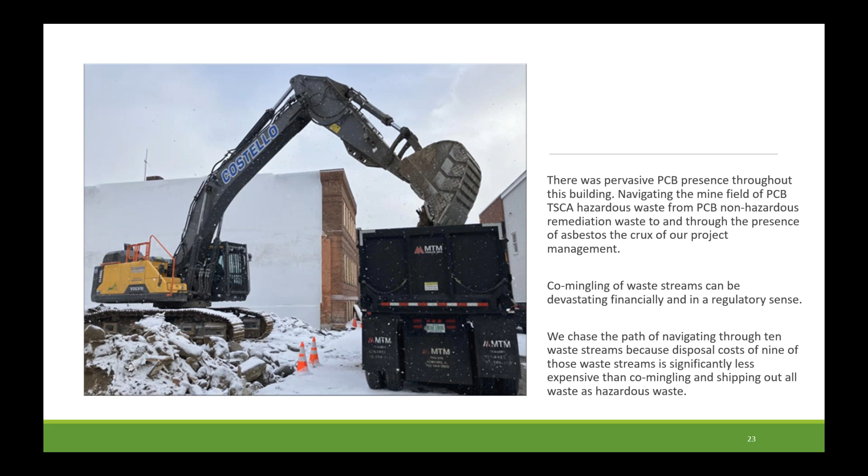We found one of the most difficult or time-consuming aspects of this is getting approval at disposal facilities for each of these waste streams. It's a very complicated, time-consuming project, but overall we were able to offer the owner, the city of St. Johnsbury, a very substantial value engineering savings of over $100,000 by separating the waste streams and not commingling everything as hazardous material going to a landfill in Wayne, Michigan.

So Jennifer, if you move—as I said, we had contamination. We had 10 different types of contamination, and 10 different criteria we had to follow at all these different landfills and disposal facilities. It became understanding the regulations and disposal parameters of each landfill, essential to identifying where everything would go, and why we were collecting materials in some cases in 10-ton lots to separate, say, item number 7 from number 8. There could have been $150 or $200 a ton difference in disposal cost. So it was very important to maintain that vigilance and keep your head up about how to do that with a brownfield site that's highly contaminated.

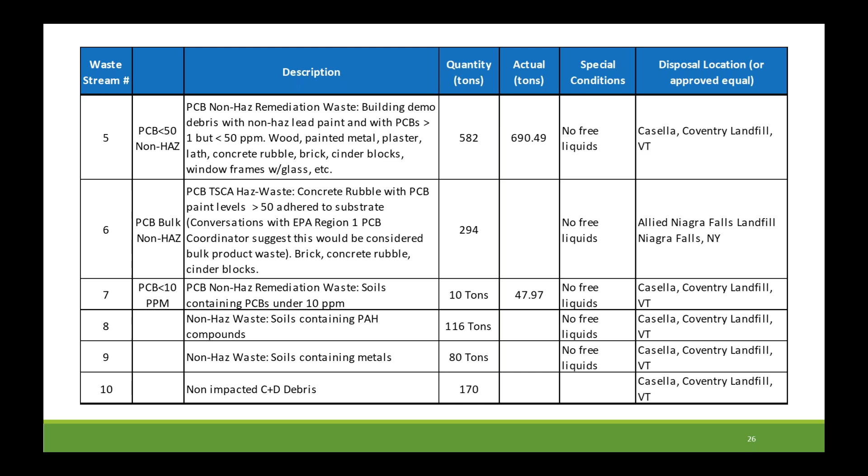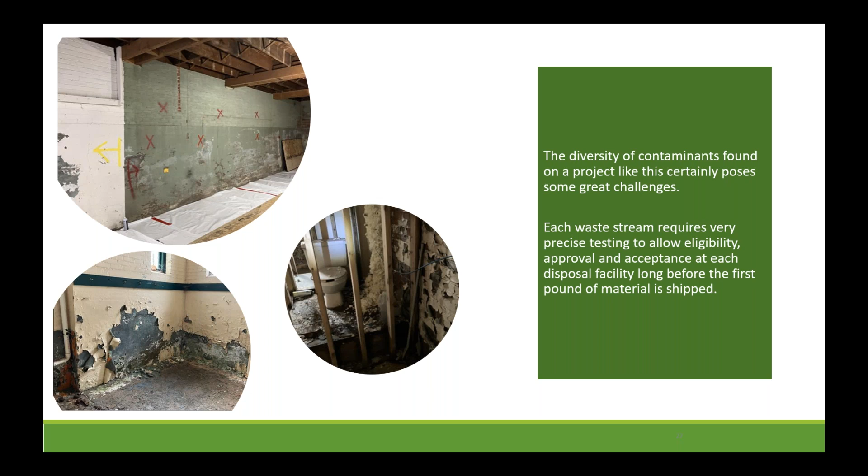Okay, Jennifer. Again, it was identifying 10 different streams and conducting your work as it went along—we had some changes along the way. One thing we thought was the slate roof would go as a clean material to an asphalt, brick, and concrete processing plant for recovery. But we found there was PCB-containing asbestos glue daubs that held the mastic to hold the slates down. All that had to go out as a mixed PCB asbestos waste stream.

You see on the exterior of the building some areas that had caulking, around the windows, that was high PCB content and was segregated and treated differently from any other building material.

So similarities that you might recognize—one of our high reach excavators with a rotating demolition tool on the end, which we used on this building like we used on the South Boston building, to sort and segregate material. That follows our theory and work plan to have equipment versatile in multiple dimensions. You also see careful separation of materials for source separation, in this case different, very restricted waste streams, waste categories, and disposal sites. Some of the same principles we followed throughout the other job, we enact on every project we do, and they're certainly in play here.

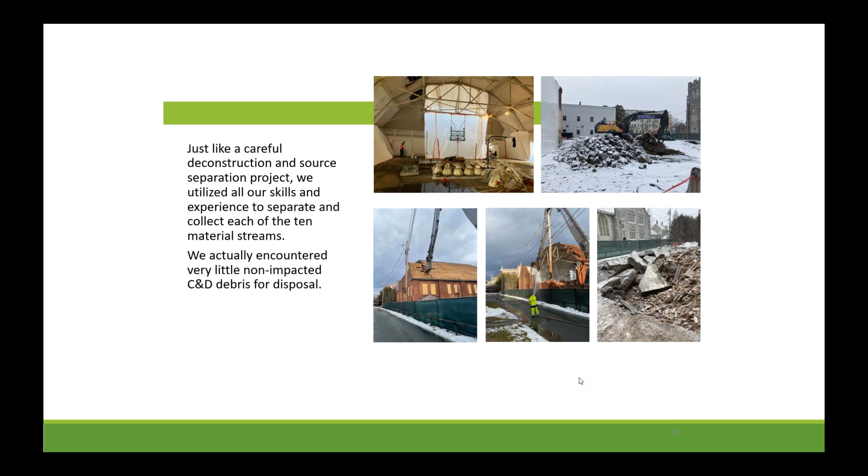I hope you enjoyed that. It gives you a little insight into some of the brownfields issues that you all face in your properties throughout your regions. There are certainly many different ways to look at a project and try to fine tune it.

My takeaway from St. Johnsbury was the amount of time and effort spent on pre-testing. I know it's very expensive, and sometimes it's easier to throw in the towel and say everything will go out as PCBs or asbestos. But you can work with a contractor to try to find a better solution. I'd offer that to anybody—if you want to call me for any reason, I'd be happy to help. It's well worth researching these things, because substantial money can be saved in the way a project is executed.